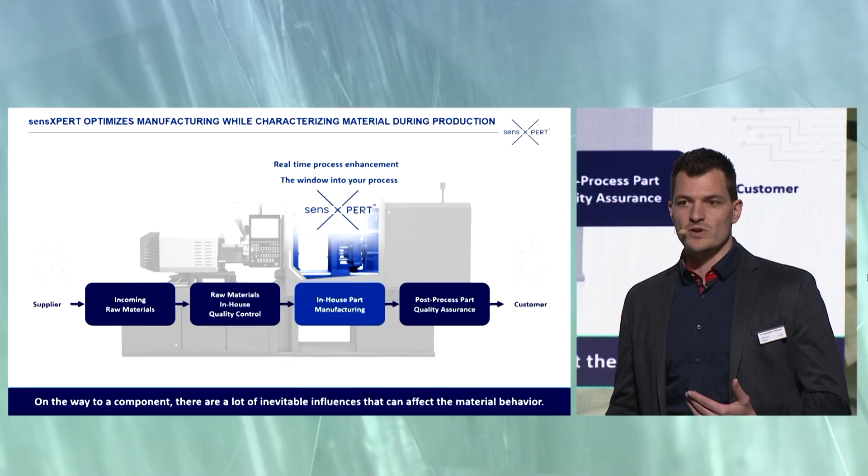We know that today customers are performing quality control before molding the components based on the pure resin or even the semi-finished products, and after the production at the already manufactured components. But there, it's already too late to readapt the process and to optimize if we have been in danger of a scrap production, or if the process simply is too inefficient because we have safety times of 40 minutes, 1 hour, maybe 1 hour 30, based on the manufacturing processes we have seen so far.

How is the product set up and how does it work together? We have sensors characterizing the material in mold during the production of the components. Here, the sensors are widespread in different manufacturing environments, from tape laying and then later on autoclave curing, resin transfer molding, high pressure resin transfer molding, injection molding, SMC, it doesn't matter. You can use the sensors in whatever process you're working with.

The sensors are connected to our so-called edge device. This is the brain in the production environment. This is a device that is in connection with the machine to monitor the machine parameters for every single product produced, and to also have the material data in the cavity, how the material behaves in real time.

On this edge device, we have machine learning models that are being executed in real time, taking the information from the machine parameters and the material behavior in the mold, where we have what our sensors do, the material characteristics, so really curing, crystallization, deviations in the material, even the flow behavior and the viscosity, but we can also connect other sensors like temperature or pressure to get more information about the process.

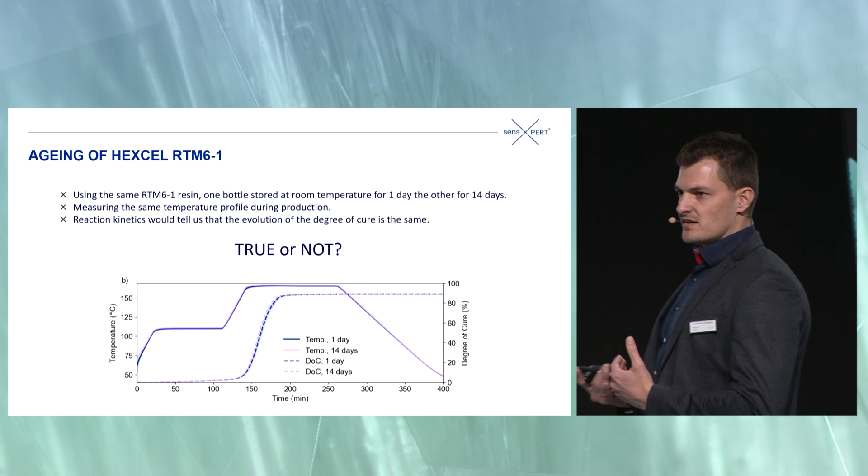Hexcel RTM6 is said to result in the same mechanical performance when it is stored at room temperature after taking it out of the freezer for 1 or 14 days. So it is said that if you have stored the material 14 days at room temperature, it will result in the same performance. And that's true. It will do. But state-of-the-art technology uses data from the laboratory environment. So we characterize one batch of RTM6. We cannot take into account all the deviations that can occur during storing,

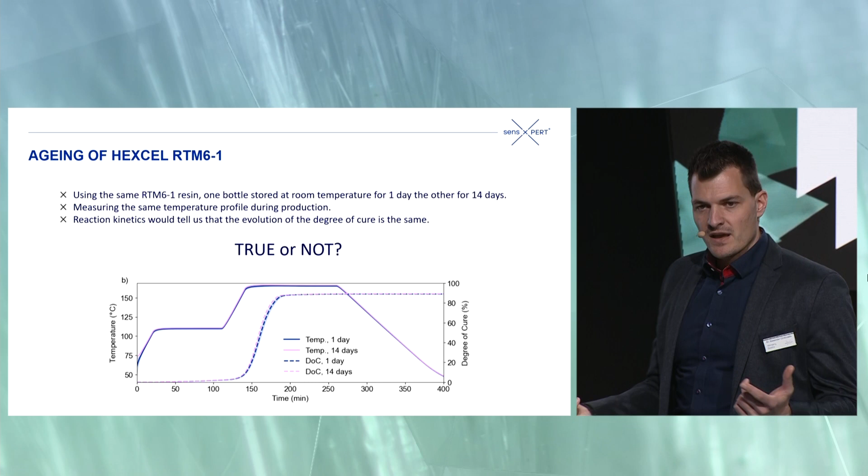during pre-curing in this case. But if we take state-of-the-art technologies, then we would measure the temperature in the process. This will remain the same. We don't make any change in the manufacturing environment. And this would lead to the information that we would say we have the same temperature profile, the same manufacturing conditions, so the material, if it is stored 1 day or 14 days at room temperature, will behave the same. Now the big question, true or not?

Please raise your hands. Who of you is for true? Nobody, I pushed you in this direction. Be honest. Who of you would say, yeah, that's state of the art? This is what we do today, so we would say it's behaving the same. Please raise your hands. Thank you. I can tell you it's not true. If you do that, go one step back again. What did we do?

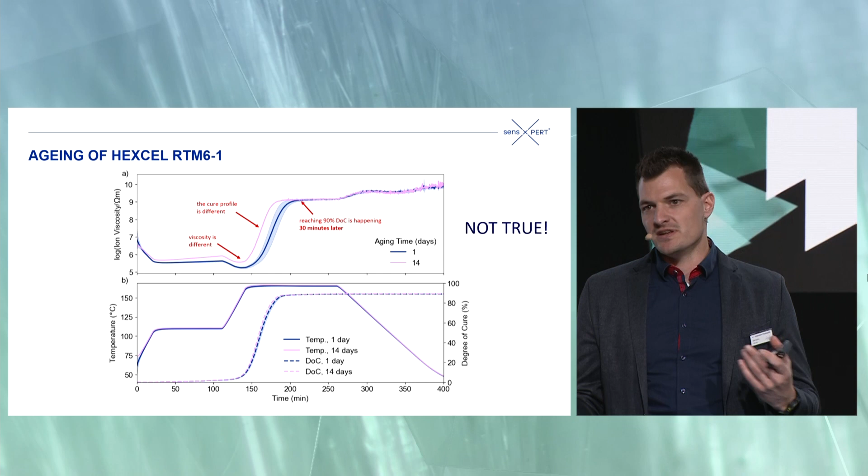Hexcel RTM6, the reference is a laboratory measurement, one batch of material. We create the reaction kinetic model that just uses as input data the temperature in the manufacturing environment. But if the material deviates, we cannot take that into account with state-of-the-art technologies. This is why reaction kinetics would say the same behavior, but what you can see on the upper picture is the deviation that really happens. Yes, the mechanical performance at the end is the same, but the behavior during production is totally different.

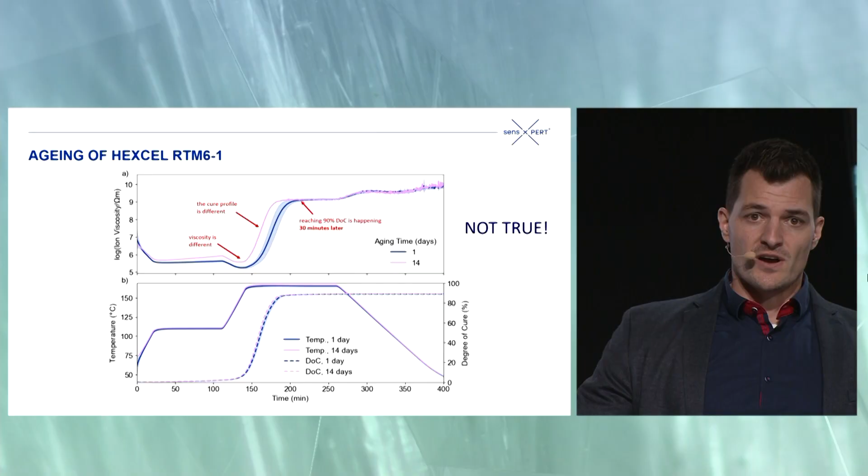You can see the viscosity behavior is different, so the older the material, the higher will be the minimum viscosity during production. Even the pre-curing at this infiltration phase is visible more and more. And you can see that the older material cures faster, because we have a lot of solvents within the resin that can degas during the procedure of storing it at room temperature. And that is why the system cures faster. Even the inhibitors blocking the reaction are a little bit weaker with the older material here, because the inhibitors will get destroyed from time to time.

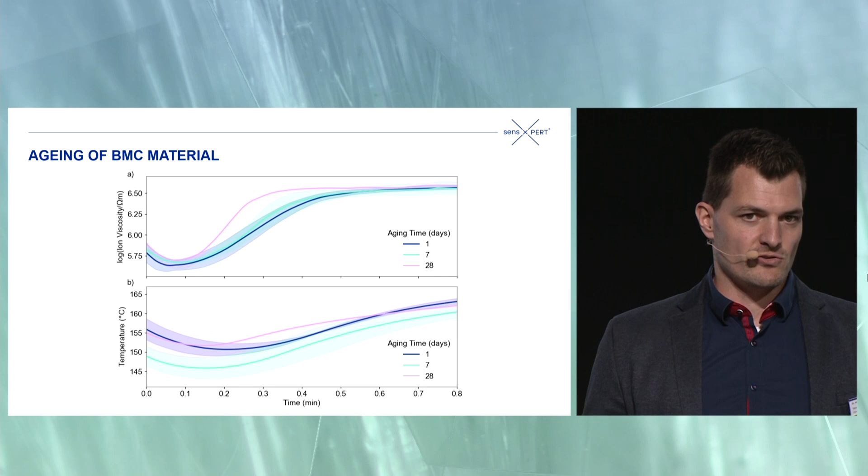Our next example here, this is an example of a bulk molding compound. Even there, in the bulk molding compound, we usually have a high styrene content. Again, a solvent material. This can also degas. That means the older the material, the lower is the styrene content. And that also means the older the material, the faster the curing process will be. And even the viscosity, the minimum viscosity, is changing.

And if we use different batches of material and we are aware that the viscosity is changing, the cure behavior is changing, we can adapt the process in a different way. Because what we could see here from this picture, the older the material, one conclusion could be the faster I can produce my parts.

But be careful. We see that the viscosity is changing as well, and I have to entirely fill my cavity to get a good part out of that. So I need to know how my material behaves, not to be in danger with all the material deviations that can occur, that I produce scrap parts at the end.

The next picture, mixing ratio effects. For most of the epoxy resins that are out there today, it's already proven that a mixing ratio of plus minus 2% in the hardener content results in the same mechanical performance. So I have an interval minus 2% up to plus 2% in the mixing ratio compared to the ideal state, that I get the same mechanical performance of my components.

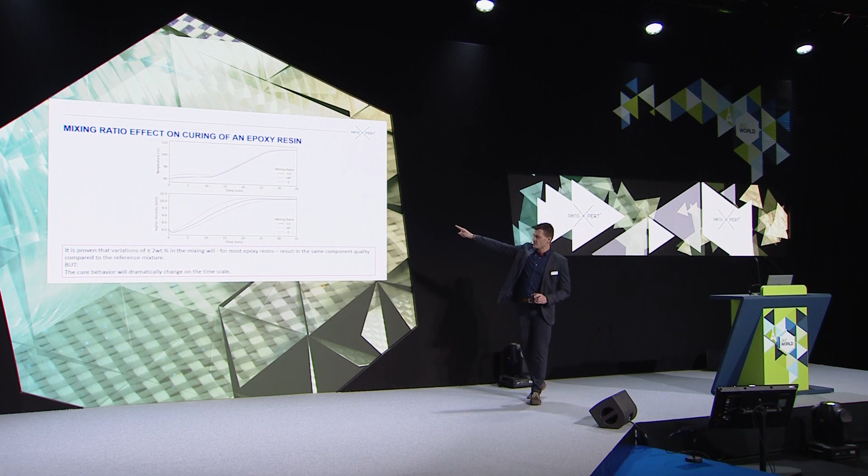But during production, we can see that the cure behavior is totally different. And here in this case, and that's quite exciting to see, usually I would say if I have more hardener content, the system should cure faster. But it's not. It's somehow blocked. You can see that the reference mixture is the fastest one. And the two ones with minus 2% and plus 2% of hardener content, these are slower in curing.

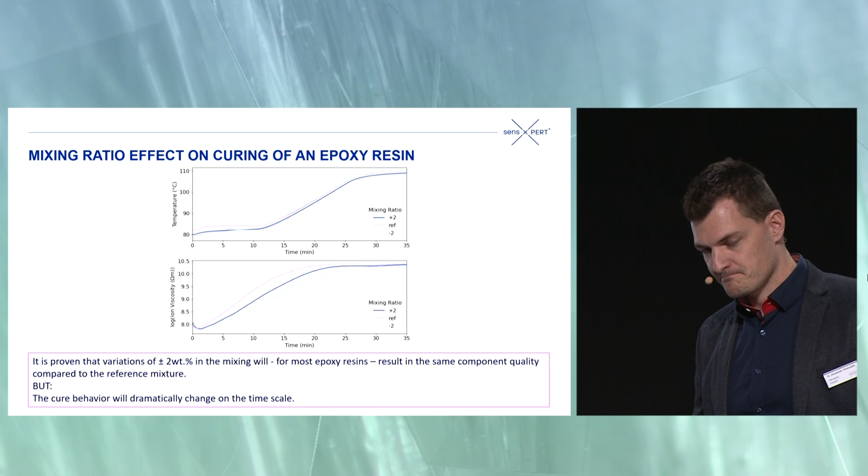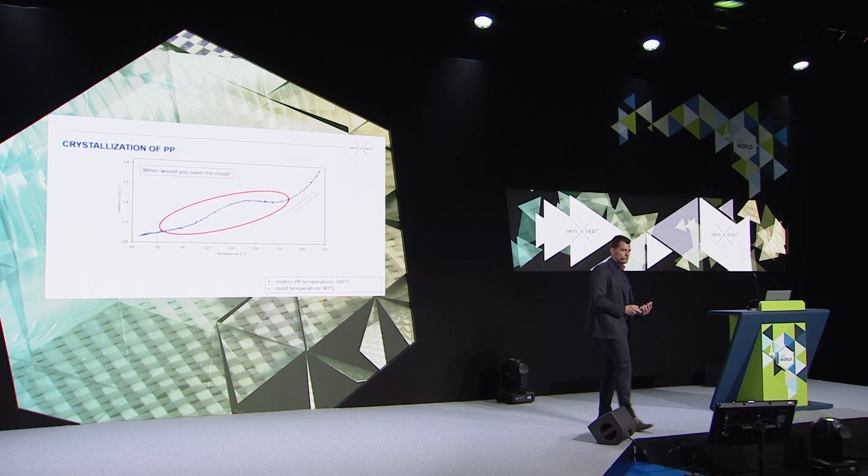But in terms of shorter cycle times, cost reduction, energy reduction, I have to find a balance between stability, mechanical performance, a little bit of warpage I can deal with, where I can find a spot anywhere here, where most of the crystallization has already been finished, but I can find a balance in between process efficiency and material behavior and stability in this case. So you always have to know what happens in the mold to really create efficient processes while ensuring the component quality. And this is what we stand for, what we are doing.

But not to just bother you with examples from reality, even to show you some use cases with customers and at the end the financial benefit, because these are the numbers at the end that count. Yes, we all want to act more sustainable and more efficient, but we are always looking and talking into companies where earning money at the end of the year is the factor that decides which way to go for.

So first use case, electronics encapsulation. What you see here on the picture is the new brain of a new e-motor series of one of the German OEM car manufacturers.

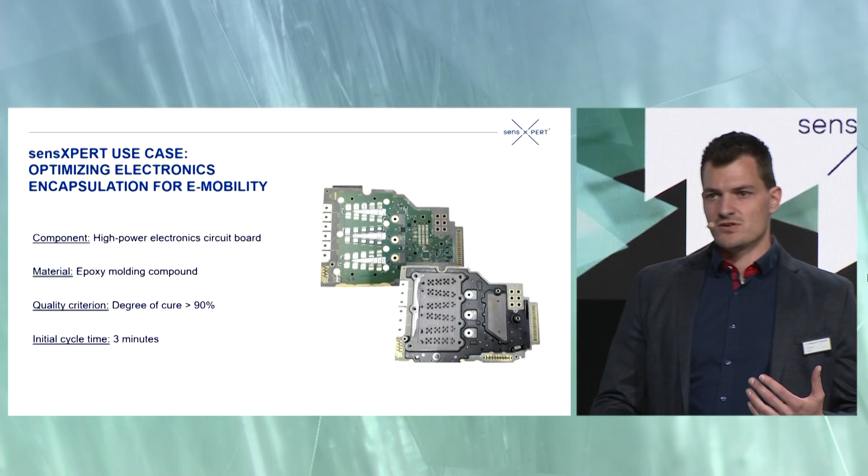The electronic circuit boards are getting encapsulated to be resistant against acids and humidity, mechanically stable, and shock resistant. And what this customer is doing, you can find it in the web, which customer this is, so I can name it here. It's ZF Friedrichshafen, one of the biggest German suppliers in automotive.

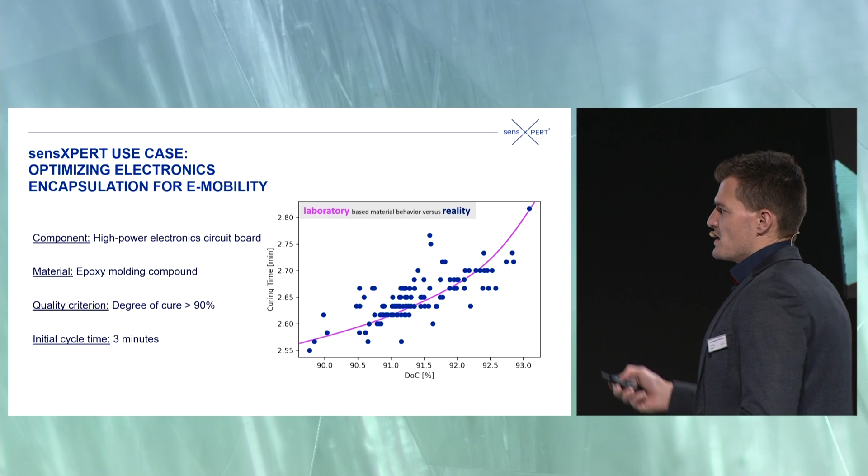What they did in the past was a Six Sigma evaluation, a process setup of at least 1.5 years from prototyping up to series manufacturing. They lost the information about the correlation and dependency between 40 different parameter variations in the process and the relationship to component costs and quality. This is where we stepped in.

We showed them pretty fast the relationship between the different parameter variations and the effect on component quality and component costs. This made it happen for us that we stepped into the series production, and now we control the process in this case.

ZF initially, you can see it here, manufactured the components with a cycle time of 3 minutes in a multi-cavity mold. 3 minutes was, for ZF, the balance between component quality and shortest possible cycle time, while knowing that they have a lot of safety times on top because the material deviates, and they need to make sure that the scrap amount is as low as possible.

But what you can clearly see on this picture is the blue dots are the real material behavior in a series production environment. Here you can see an excerpt of 50 parts that have been characterized and monitored. And the purple line is what you would expect if you characterize the material from one batch in the lab and try to predict the process behavior of the material.

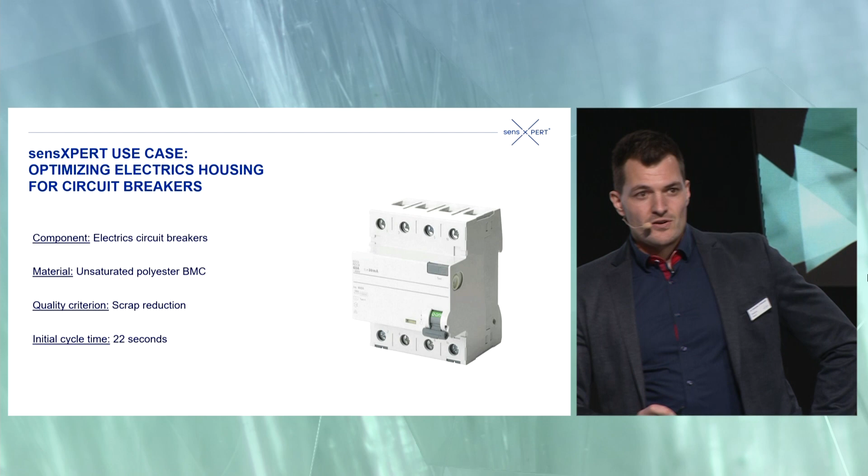Another example, unsaturated polyester in an electronics environment. Every one of you knows these circuit breakers. You all have them in your household. What do we talk about here? We talk about an initial cycle time of 22 seconds. So pretty fast for thermoset processing.

But even here, this is a very, very optimized manufacturing in one of the oldest and biggest companies in Germany, where even here we talk about 260,000 in burnt money every year per manufacturing line.